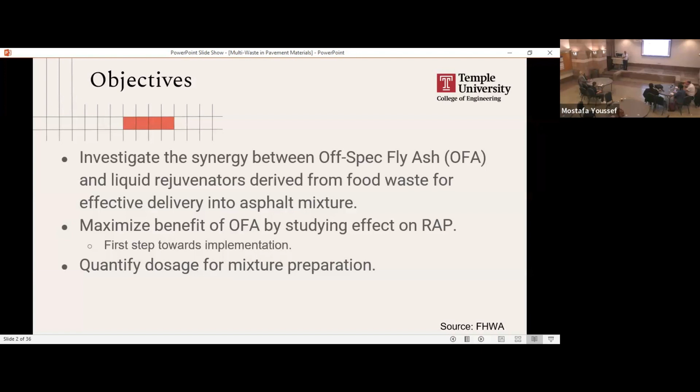You know, asphalt as it ages becomes very stiff and brittle, so it's typically prone to cracking way more when it's recycled. Combining it with an anti-aging additive, which is the fly ash, and a rejuvenator, which is the food waste oil, and increasing the capacity for incorporating recycled asphalt, we could replace a large quantity of raw material that is being mined and reduce the cost significantly. So this is the whole story, very quick.

And in order for us to visualize why this is important, this is a quick look at how the aggregate asphalt structure is used for carrying the load of traffic. The asphalt itself shouldn't be carrying any load. It's a binder to hold the aggregate structure together so it can carry the load. So in reality, what's carrying the load is the interlock and contact between the aggregate particles.

And in order to keep them in place such that the stress is distributed over these thousands and thousands of contact points, we hold them together with the binder. And the binder itself is not just the asphalt. Like we were talking earlier, it is the mastic. It's the blend of fines and asphalt. The weakest link in this structure is the binder.

So we typically have failures starting with either overcompaction during construction, crushing the aggregate, but that can be mitigated through good quality control during construction, or failure within the mastic phase, which takes place either if you're using very soft materials, so it acts like a lubricant between these particles, letting them slide against each other and deform, like in the form of rutting, for example, or if the asphalt itself is aged so that it would crack.

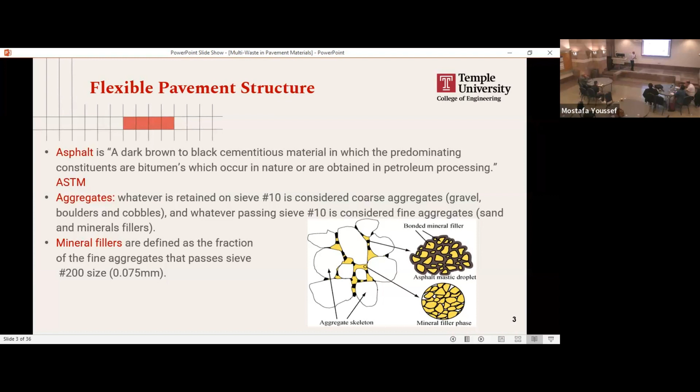So as I was saying, we're looking at 3 wastes to be incorporated, and we're trying to investigate the synergy between these wastes to see if this is really an approach that is worth further pursuing or not. These wastes are coal combustion byproducts, the ash, but not any ash. It's the off-spec ash, the ash that nobody wants to claim, and that ends up in landfills. The reclaimed asphalt pavement, these are the pavements that are removed, old pavements removed and dumped, and a food waste bio oil that is extracted in the lab.

And we're still contributing to this landfill because, again, these are called off-spec ash. They vary in their properties depending on the source, depending on the power plant itself and how it was burning and how it was treated, the coal. But it's an abundant source for this kind of approach, to mine as much as you possibly can and reduce the footprint of these landfills.

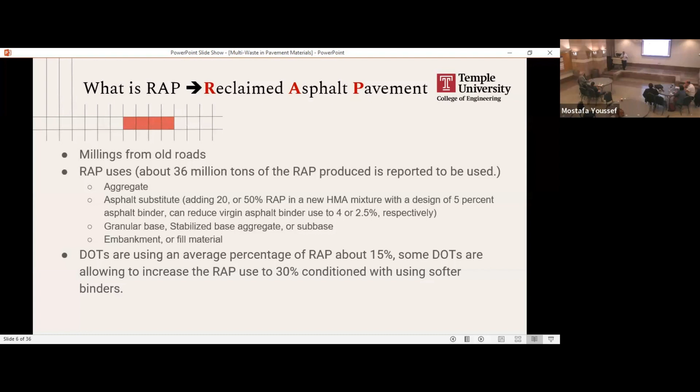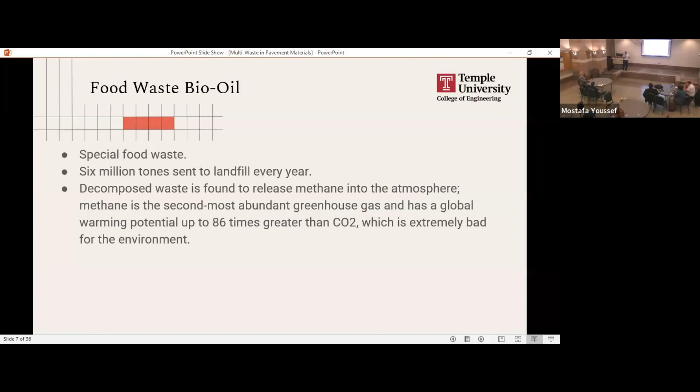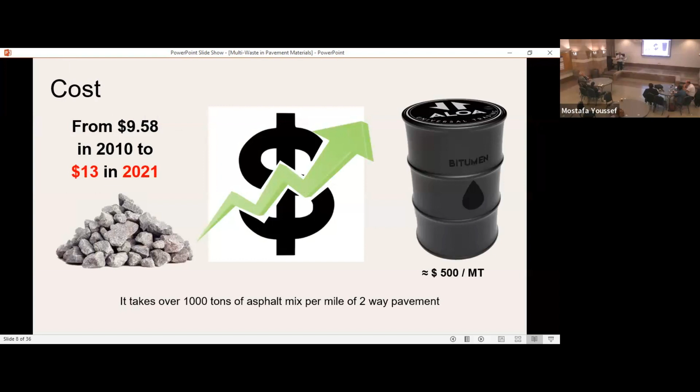And that's food waste oil. We're producing 6 million tons every year that end in landfills. So again, reducing the footprint of landfills and upcycling is really the theme in this study. If you combine all of that with the increased price of oil and the following increased price of asphalt, it makes perfect sense to join forces with these materials in order to achieve a good quality product.

Keep in mind that if you're building a mile of asphalt pavement, it costs you about $1 million. The materials itself is about 980,000 of those. So whatever you can contribute towards reusing and even upgrading the properties of the old materials, the amount of savings will be immediately realized.

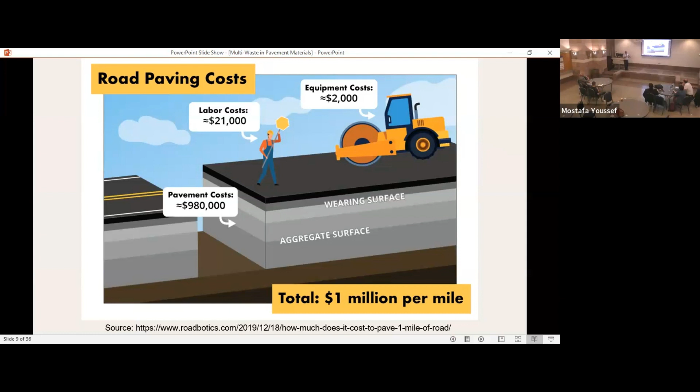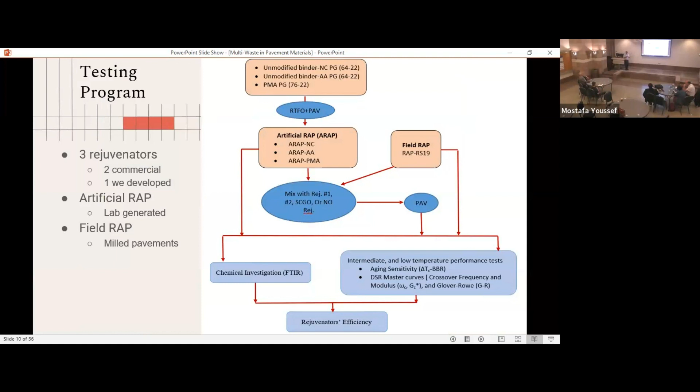Can you please mute yourselves?

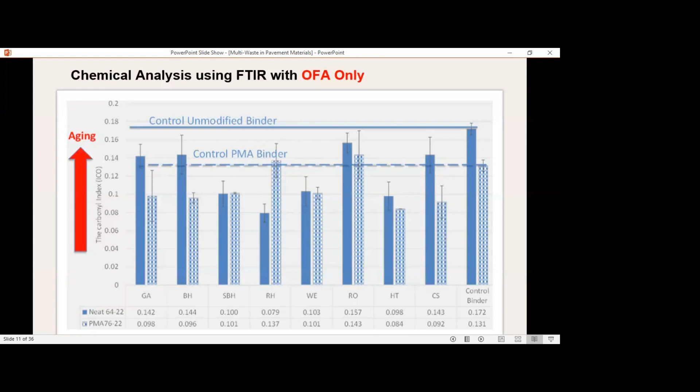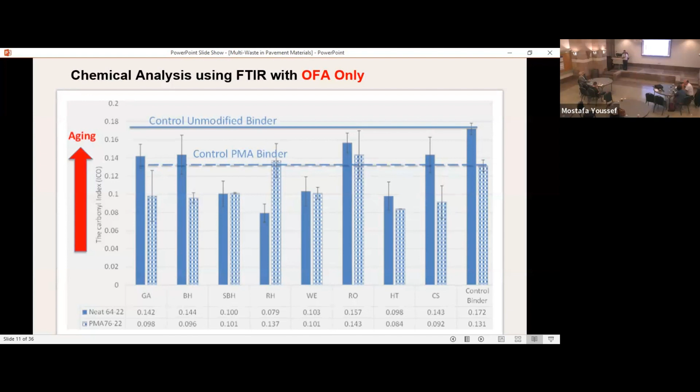Same trend we have seen in the morning, afternoon. The polymer modified asphalt has mixed results, but for the most part, its aging rate is also reduced. So this has been established and published in many papers already by our team. So we moved on using the ash as a certain type of, I don't know if this is my mic or what is causing this, but as an aging retarding additive.

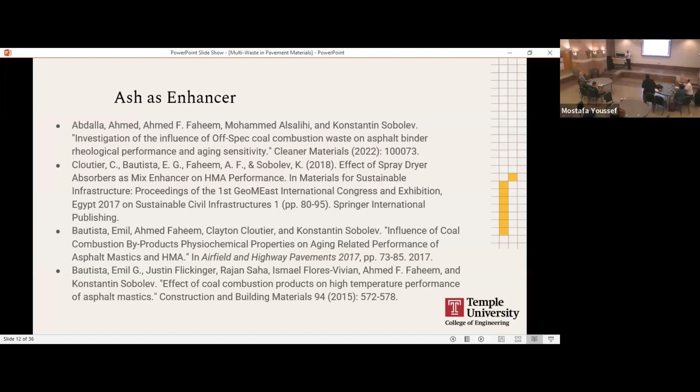Then the bio oil itself, we started looking at, does it really have a rejuvenating effect or not? So what we did is we compared our developed oil to market-ready oils. The way you look at the rejuvenating effect is you evaluate the change in the binder before the addition of this additive and after the addition of this additive, then aging it, then testing.

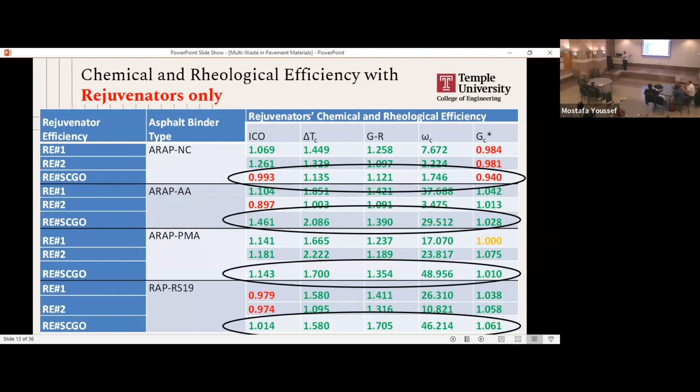These are the different rejuvenators, through changes in fundamental rheological properties, crossover frequency, crossover modulus, through the improvement in thermal relaxation with the delta TC, through even improvement in the chemistry with the FTIR measurement. And again, that work has been published.

So at this step, we know this additive works alone and this additive works alone. Let's take another step further to look at the synergy between them. So they both together can help produce that upcycled product that can also be delivered easily into the system.

Ash as a powder to be added to the system will always be competing with the fillers in the system, the fines. So its effect might not be fully realized given the way the industry works. Again, the mixes were not going to be used or created the way we create them in the lab. They are produced in a different manner.

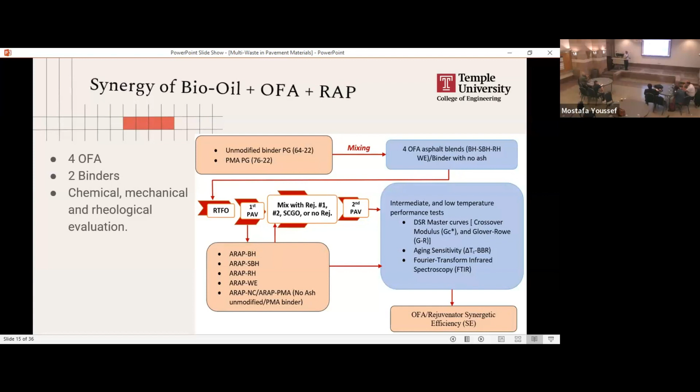So we had to think about this also from the implementation point of view, that the combination of these two additives together provides us with a delivery system that is effective. However, we wanted to make sure that when they are combined together they will get us there. So again, we developed a very comprehensive study looking at different RAPs, different binders, different properties, to provide at least a proof of concept. Again, synergy.

The first and most important test, in my opinion, would be looking at the fundamental change in the rheology of the asphalt. I think I saw this graph two presentations ago for the complex modulus. In a viscoelastic material, you have your elastic component and your viscous component contributing to your overall modulus. What controls the contribution is really the phase angle between them. At the angle 45, you know that G prime and G double prime are equal.

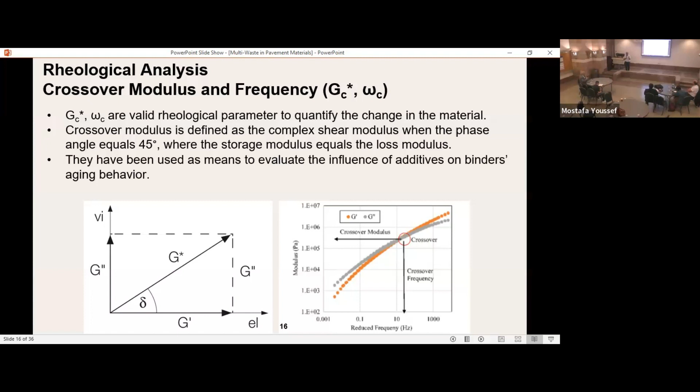If this is 45, through the addition of these additives, a shift in the value of the frequency that leads to this degree, or a shift in the value of the modulus at this level, indicates a fundamental change in the rheology of the material. And the type of shift indicates if it's an improvement or not. So we looked at the crossover modulus and the crossover frequency of our additives as a one-unit product: this rejuvenator and the off-spec ash.

What we have realized is that we are having an effect on the crossover frequency and the crossover modulus as well. How does that translate to actual performance? So we conducted mixture level testing, as I will show you later. But we also wanted to look at what is the state of the art being applied in the asphalt industry right now.

Right now, everybody's going after this function because it is a measure of asphalt ductility. It's called the Glover-Rowe parameter. It is measured from the master curve at a specific frequency and a specific reference temperature. And it's highly correlated to ductility of the asphalt through other tests and field studies. So a lot of DOTs are trying to push for using this parameter to replace the typical Superpave parameters for fatigue cracking.

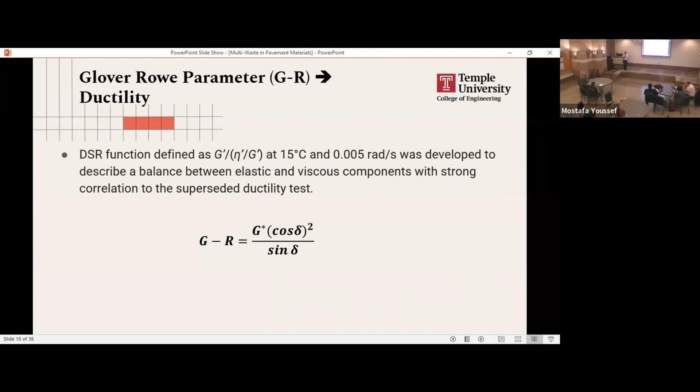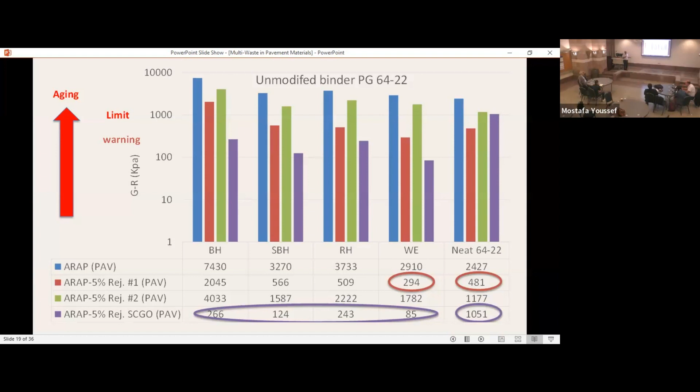The highlighted or circled ones are the ones showing improvement in the Glover-Rowe, and you can see it's consistently with our rejuvenator combined with the ash. But the picture changes significantly as you go to the polymer modification.

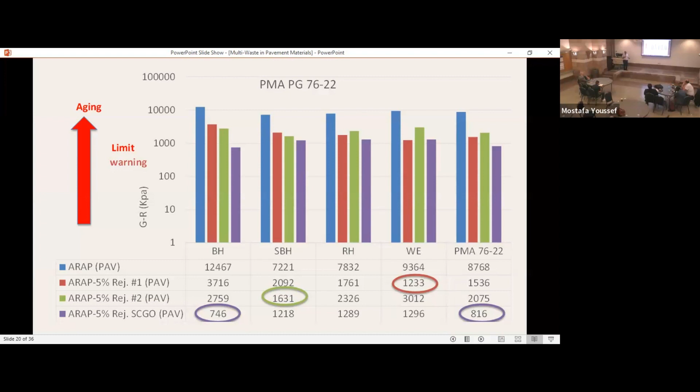Again, the dominant component in the polymer modified binder is the polymer, especially if it's cross-linked like the one we're using. So the incorporation of the particulates sometimes even impedes the effect of the polymer. So the improvements we see are scattered all over the place. We don't see significant worsening in the fatigue cracking susceptibility. The performance stays the same, for the most part, for all the different combinations.

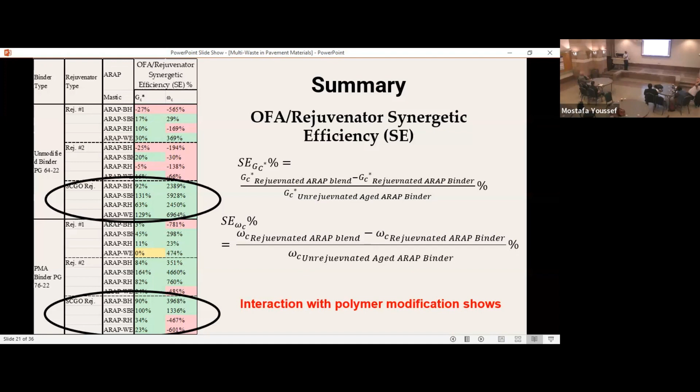So if we calculate the efficiency of these rejuvenators through these formulas, we realize that the combinations where our food waste oil is used combined with the ashes, even for the polymer modified, show some improvement and some mixed results. So again, interaction with polymer is complex. I'm sorry, I should have moved down. There is a word, mixed results, missing.

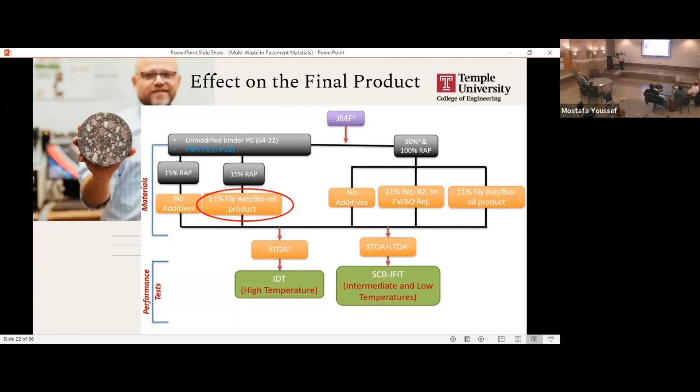So again, like we did before, let's look at the final product and see what the mixture will do with these kinds of materials. In this case, the control will be 15% RAP. So 15% of the mix is already waste material, combined with another 11% from the fly ash and the oil. So we're trying to maximize the amount. After that, we also tried 50% and 100% RAP. 100% RAP means the entire mix is fully waste material.

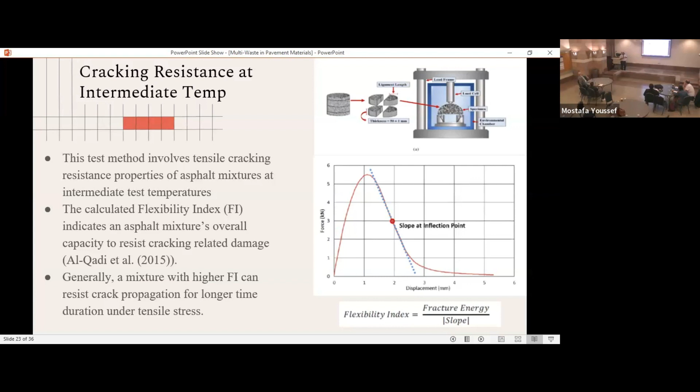And again, we build from there, focusing on damage properties. This is the semicircular bend test, SCB, where you create a sample with a notch, so you control the crack, and you apply simple bending at room temperature. What you measure is not only the fracture energy, but the flexibility index, which is the ratio between the fracture energy and the slope of crack propagation. So the energy required to initiate the crack, and the crack propagation rate. The higher that ratio, the more flexible the material.

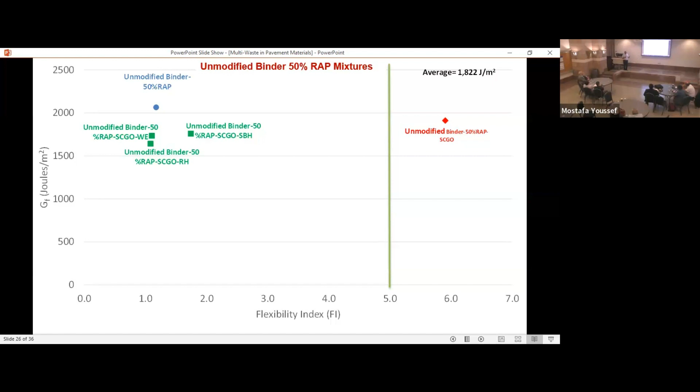Increasing the RAP, again, aged binder is highly brittle, so prone to cracking. You will notice the range of performance for the flexibility index is already very low, and most of the mixes are not meeting the limit. The only one meeting the expected limit, which is not a standard limit but recommended by the developers of this test, is the unmodified 50% RAP with the food waste oil. So the presence of the ash here seems to have dropped the flexibility, but the oil itself has maintained some of that flexibility at 50% RAP.

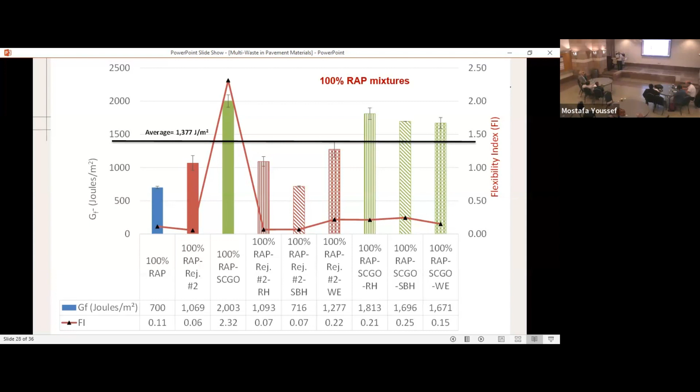With 100% RAP, the best performing mix combinations are the control RAP with the food waste oil and the ones with ash. However, that is still not at a very high level. Its flexibility index has improved, but usually we want values above 5. So 100% RAP, as expected, would be very prone to cracking. The dosage we used has shown a little bit of improvement, but not to the level where you want it to be performing well.

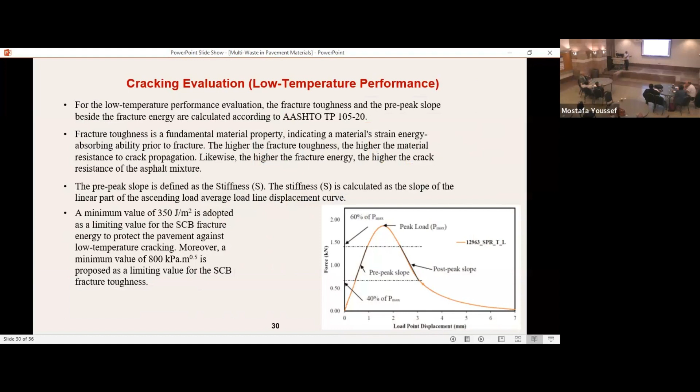But in my opinion, we are moving in the right direction. We're increasing flexibility and crack resistance, and that's the most critical part in using RAP. What would really seal the deal for us is low temperature. At low temperature, asphalt, even unaged, becomes very brittle. So we did a test similar to the previous one: a controlled crack, with a notch to initiate it, to evaluate the fracture toughness, fracture energy, and the slope of crack opening.

And if you compare at 15%, the recommendation for the fracture toughness is 800 kPa·m^0.5, and the control for the fracture energy is about 350. All the mixes meet it, even the control one without any modification. And that's why the standards in the US, at least, allow up to 15%, because that typically doesn't cause significant deterioration in the performance.

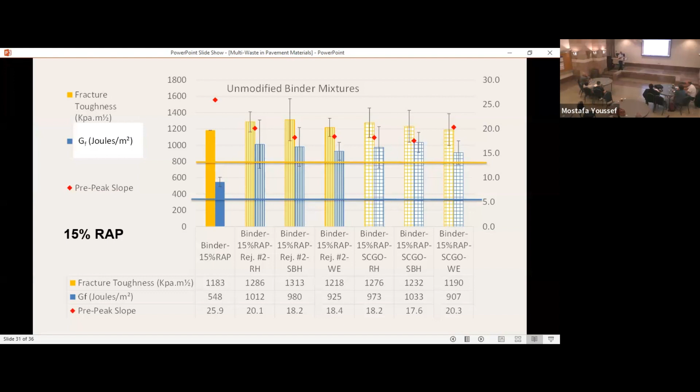Same goes for the polymer modified. But if you increase the RAP content to 100%, you will notice that at low temperature, they still meet the requirements. So the recommendations, in my opinion, based on this result, are a little underestimating what really needs to be met for field performance. But it allows us to do a comparison, comparing our control with rejuvenators,

and you will see a drop with Rejuvenator 2, but an increase in the properties with the food waste oil, indicating slightly better performance. Although if you look at the error bars, you'll see some of them are overlapping, which would mean, statistically speaking, there's no change. Even if the average is higher, if the error bars are overlapping, it means from a statistics point of view there is no significant change.

But adding the ashes with Rejuvenator 2 at least shows a drop compared to the control, and shows little or no change compared to just the rejuvenator. So the ash doesn't really add any value at 100% RAP. Moving to the food waste oil, you have a similar trend as the control, but also a big drop compared to just the rejuvenator. So the low temperature is telling us more work needs to be done.

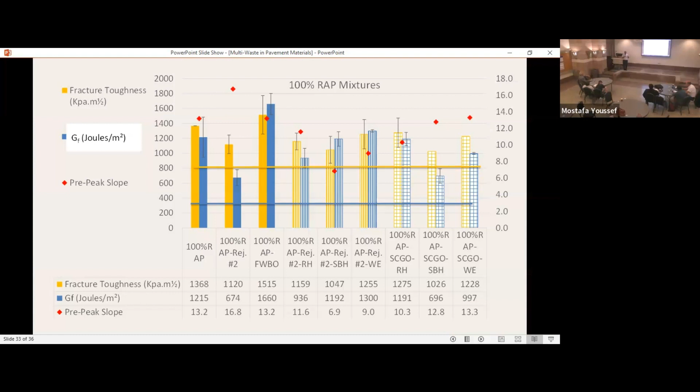However, the results from different temperature regions seem to be going in the right direction. The game now is about how to create that system better. What is the dosing? Making mixes with 100% RAP is very difficult because of air voids and many other things that are contributing to the fabrication of the mix.

But based on the results we have so far, if you're using the food waste oil with unmodified binder or polymer modified binder, you can comfortably reach even above 30% RAP with no significant change in performance. So that's double the current standard by just using these additives and the off-spec ash.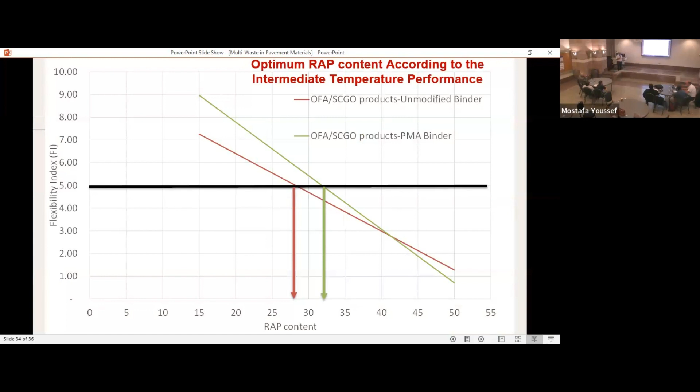In my opinion, the biggest challenge we have faced in this study, and I didn't have a chance to go deeper into it, is that the state of practice right now, as we develop mixes, because of the effect of volumetrics on the mix design, is not allowing this to reach its full capacity.

So our next phase with the next PhD student is really to go outside of the box, drop the specs about how to fabricate samples based on volumetrics, and look for a performance controlled or engineered mix design, which everybody's pushing for right now, to deviate from volumetrics as the basis of the mix, which will allow us also to play with the dosing system outside of the norms and see how that works.

We are dealing with a very different animal right now, different than when we introduced polymer modification, so we had to change the way we test, different than when we introduced high traffic volumes and new tire pressures, which led us to develop new tests and new materials. Now we're dealing with a material that we don't have that much experience in, and further work needs to be done. So my conclusion, I believe the combination is effective even as we speak,

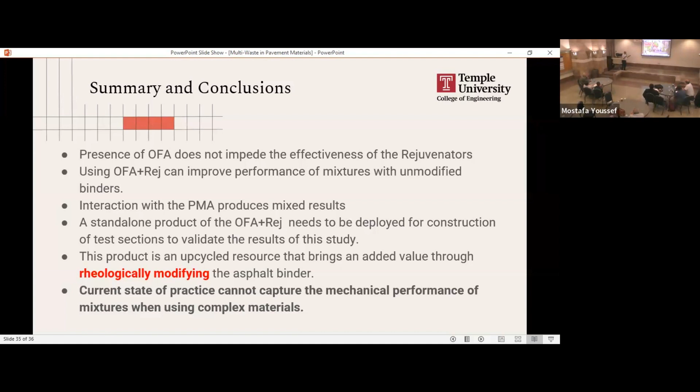I have one question. I liked very much when you were showing this energy per square meter, the G, because when you show that, it brings up the Griffith criterion for fracture. This is the fracture toughness business: the square root of E, Young's modulus, multiplied by surface energy. And if you read the 1921 Griffith paper on fracture, like I do every day, it relates to the interaction energy. So my question was, do you know more about those polymers?

Are they charged polymers? What kind of interaction are you dealing with? Because this whole thing, in the end, is all related to these kinds of properties, no? I'm always trying to ground things in chemistry. Most of the time, the polymer or the polymer modification is a black box. You're buying a product, you don't control what's in the product. So they sell you mechanical properties. But you have no idea, because you have charged polymers, you have tons of different ones.

We don't see that. I'm a rheology person, so I look at it from the rheology point of view. I don't know the chemistry and the interface, unfortunately. But the way it's being marketed, it's a cross-linked polymer that will allow for flexibility, recovery, and crack resistance, extending the range of temperatures for a viscoelastic material. But the chemistry of the interaction, I honestly cannot answer that.